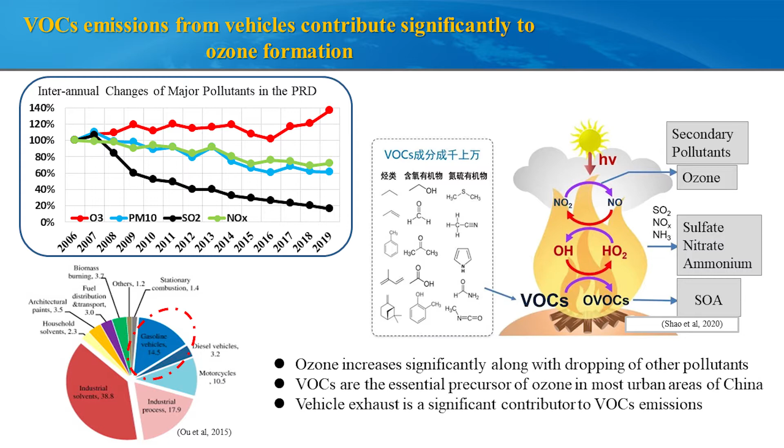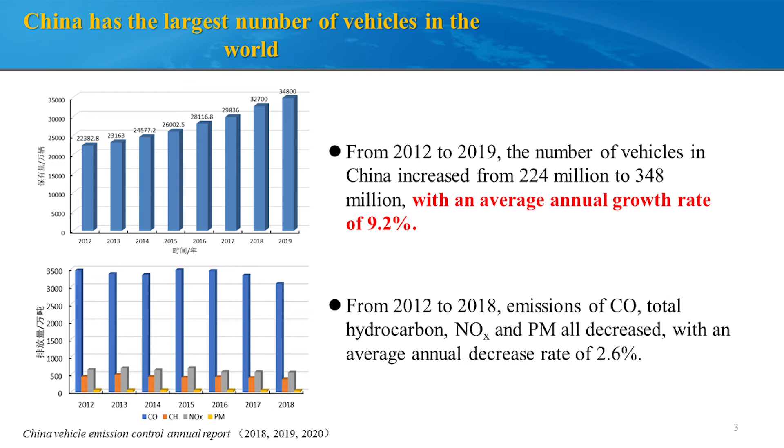In China, especially in urban areas, we know that vehicle exhaust, mobile emission, is a very significant contributor to the VOC emissions. From 2012 to 2019, the number of vehicles in China increased dramatically with an annual average growth rate of 9.2%. However, due to very stringent emission control measures, we see a continuously decreasing trend of pollutants, including CO, total hydrocarbon, NOx, and PM. Annual average decrease rate is about 2.6%. Overall, China has the largest number of vehicles in the world, so we expect China will contribute significantly to the VOC emissions.

Currently, investigation on VOC emissions from vehicles is a research frontier. There are measurement methods to study VOC emissions, for example, the tunnel study or the smog chamber measurement, chassis dynamometer measurement, and also the actual on-road condition measurement. All these kinds of measurements have been widely used to study vehicle emissions. However, a very important limitation is that previous studies mainly focused on non-methane hydrocarbons, while they largely neglected oxygenated VOC and intermediate VOC. So they cannot give a full picture of the VOC emissions from vehicles.

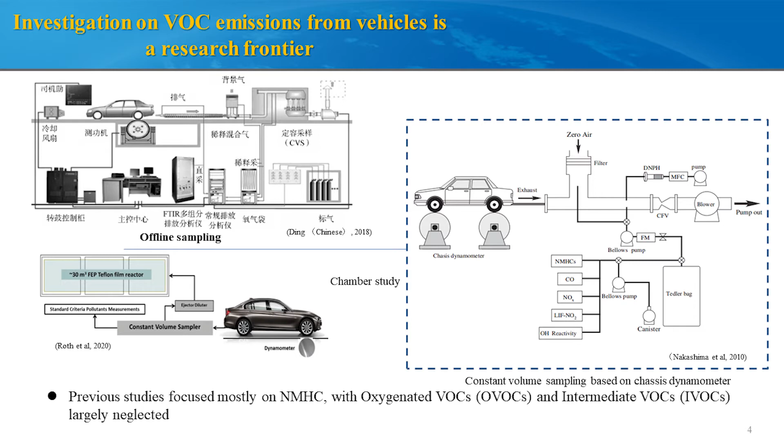So what are IVOCs? IVOCs are compounds with effective saturation concentration of 10^3 to 10^6 micrograms per cubic meter, with their volatilities lower than those of VOCs. So they correspond to alkanes with carbon number of around 12 to 22. If you increase the carbon number further, you will go to semi-volatile organic compounds. And then if the carbon number is larger than 34, it will go totally into the particle phase.

Previous study has also demonstrated that IVOCs were responsible for about 50% of SOA formation from gasoline vehicles and more than 95% from diesel vehicles. These figures are from a study in California. That is because IVOC emission studies are very limited worldwide. Most of the studies were concentrated only in the US or in China.

Characterization of IVOC emissions is quite challenging. There are two main challenges. One is for sampling, because IVOCs from vehicle exhaust are mostly emitted in gas phase. However, they have a very high temperature, more than 100 degrees, so we cannot measure it directly. We have to measure at the normal temperature, but they will go through gas-particle partitioning at normal temperature. So we have to conduct simultaneous sampling in both gas and particle phases for a comprehensive picture of IVOC emissions.

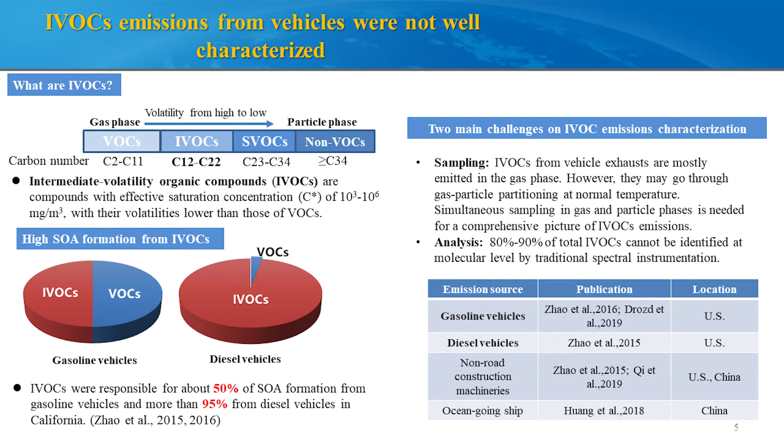The other challenge is for analysis, because over 80% of the total IVOC cannot be identified at a molecular level by traditional mass spectrum instrumentation. We have to find ways to quantify the total IVOC contribution. So the current status is that the formation processes of IVOC from vehicle exhaust are not quite clear. Impact of tightening emission standards on IVOC is not characterized; in the past decades, China has tightened its emission standards multiple times, but their impact on IVOC is not well studied. And lastly, formation potential of SOA from IVOCs is not accurately quantified.

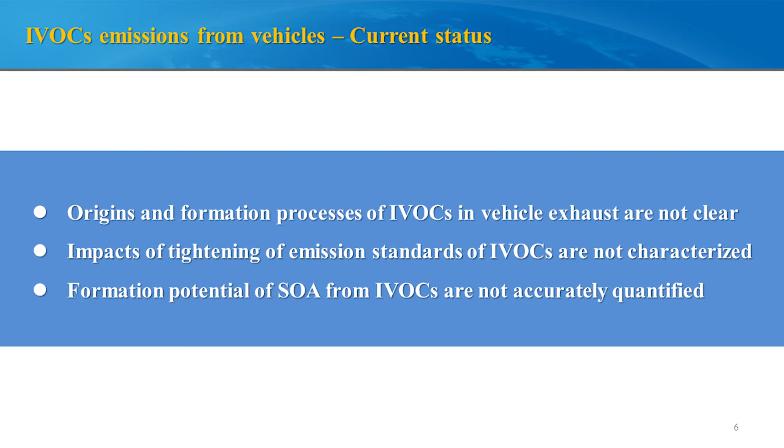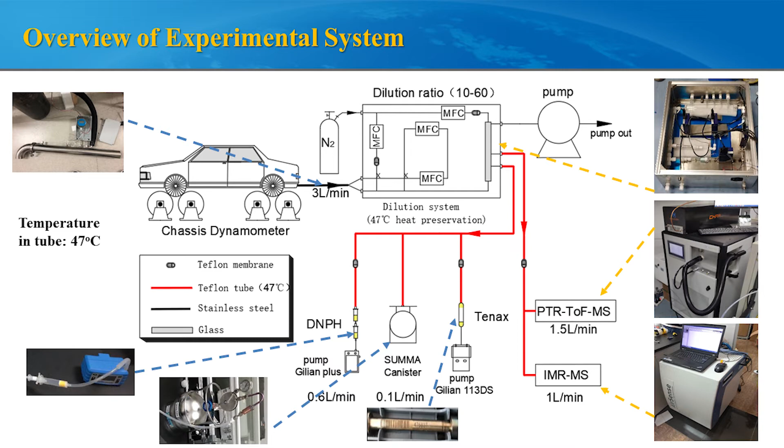In order to study these three important questions, we set up a very comprehensive experimental system, including a series of online and offline measurements. For the IVOC measurement, we have a Tenax tube behind a quartz fiber filter. To measure emission sources, especially combustion sources like vehicle exhaust, which has very high temperature, high humidity, and high concentration, we have to build a very smart dilution system. This dilution system has to be dynamic and adjustable because different kinds of vehicles may emit a vast range of concentrations.

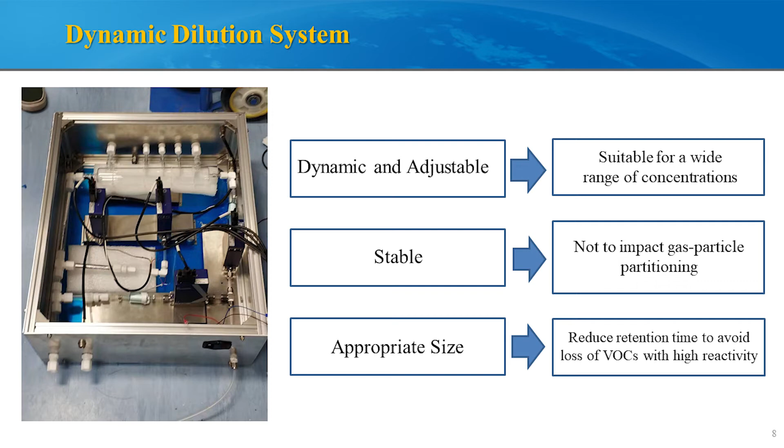It also has to be stable, because we try to avoid the impact of gas-particle partitioning, since the dilution ratio can impact the gas-particle partitioning directly. And lastly, it has to have an appropriate size, not too large. This is to reduce the retention time in our system to avoid VOC loss, especially for those VOCs with high reactivity.

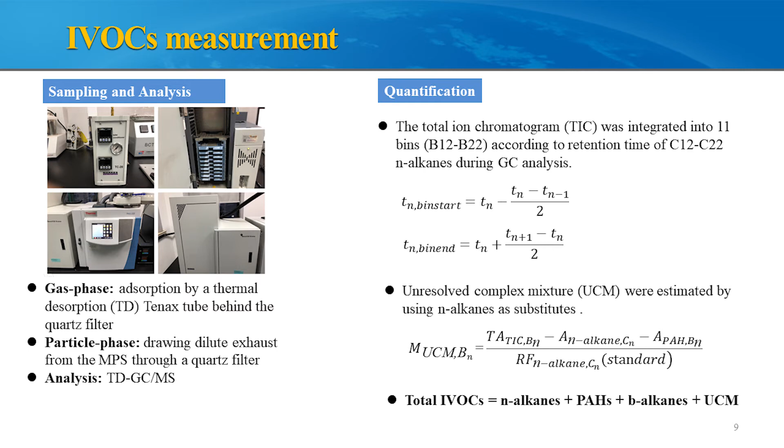For the IVOC measurement, we measure gas and particle phase simultaneously. For the gas phase, we measure by a thermal desorption Tenax tube behind the quartz filter. So we collect the particle phase on the filter first, and then we collect the gas phase by the Tenax tube after the filter. We analyze the sample by TD-GC-MS. We use this well-established method to quantify the IVOC mass and different compositions of IVOCs: n-alkanes, PAH, branched alkanes, and UCM, unresolved complex mixture. We cannot identify the specific species in UCM, so we use this empirical formula to calculate the total mass of UCM.

In this study, we tested 16 vehicles in total, including both gasoline and diesel vehicles, ranging from China 1, the oldest emission standard, to China 6, the newest emission standard. For diesel vehicles, we only covered China 3 to China 5. We used the VMAS simple transient condition cycle to conduct our sampling analysis.

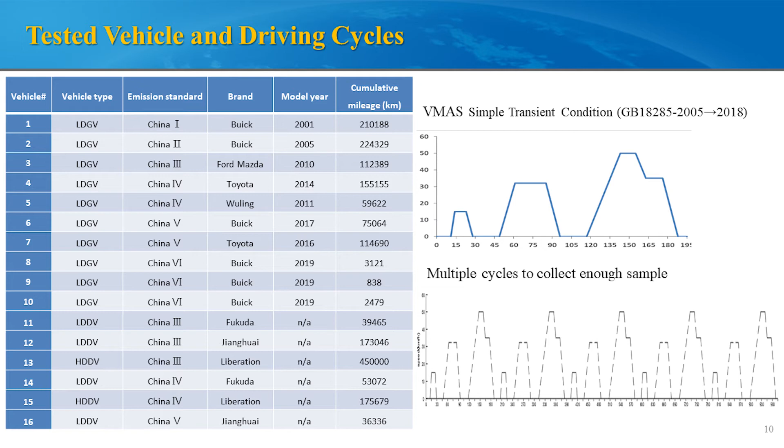This is the most prevalent method that can simulate the urban driving condition in China. And because IVOC emission is relatively little, we conduct multiple cycles to ensure that we can collect enough sample for analysis. Okay, let's look at some of our findings.

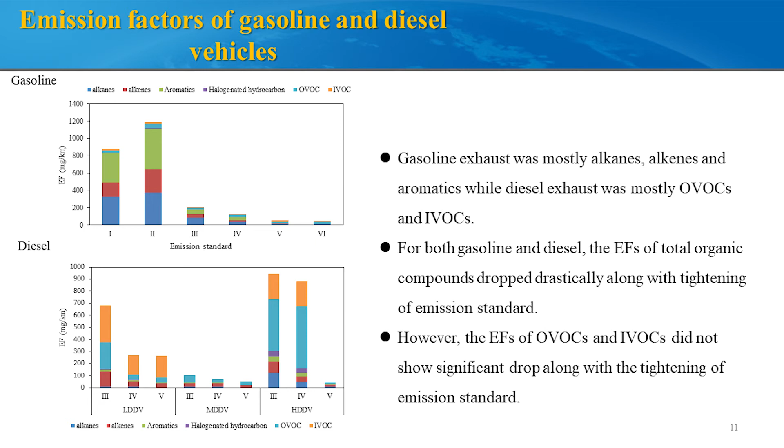However, the emission factor of OVOCs and IVOCs did not show significant drop along with the tightening of emission standard. They are almost at the same level in different emission standards. Well, percentage-wise, we can actually see IVOC and OVOC show a significant growth along with the tightening of emission standard. For example, for gasoline, from China 1 to China 6, their fraction increased from several percent to 23 and around half of the total organic emission.

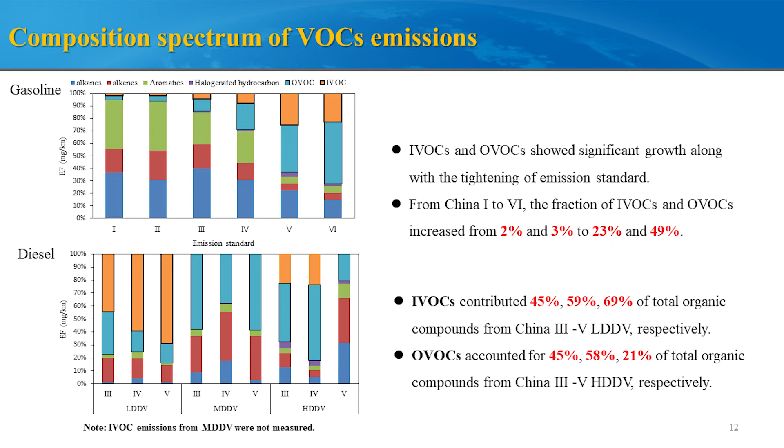For diesel, it's again the same. IVOC contributed more than half from different emission standards, while OVOC are more important for heavy diesel vehicles. IVOCs are more important for light-duty diesel vehicles. If we compare our finding with previous study in other parts of the world, we can see that the emission fraction of gasoline and diesel exhaust were comparable to their counterpart in the US.

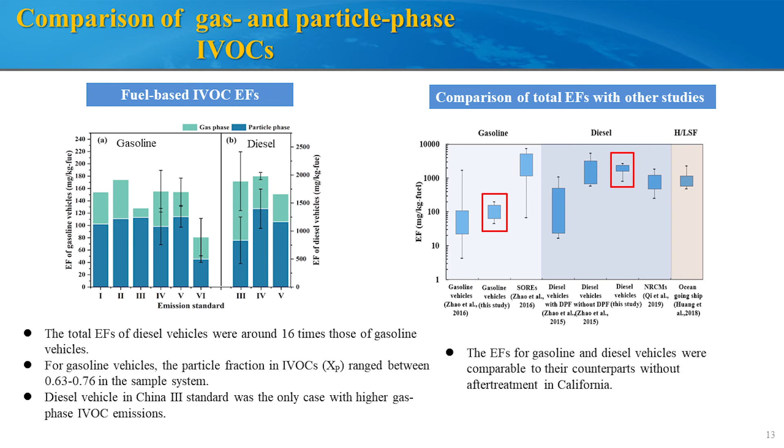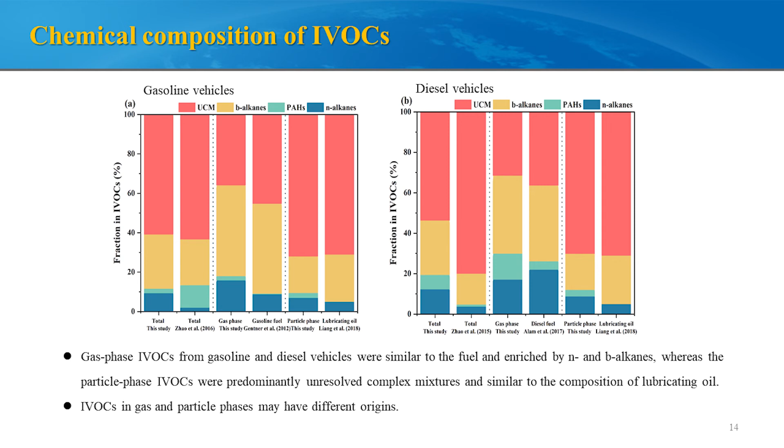However, particle phase has a different picture. This is the particle phase in our study. You can see that for gasoline vehicles, particle phase, they are quite different from fuel. However, they are similar to the composition of lubricating oil. Similarly for diesel particles, this is for particle phase composition. They are different from the diesel fuel, but they are similar to lubricating oil. So this let us think that gas phase IVOC and particle phase IVOC could be from different origins because their chemical compositions are largely different. Gas phase IVOC are mainly from fuel, while particle phase IVOC are mainly from lubricating oil.

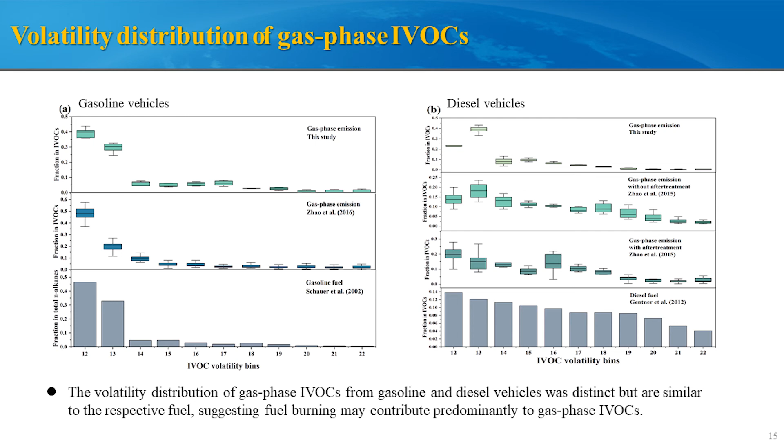So let's look at the volatility distribution of IVOC. Let's look at the gas phase first. For the gasoline vehicles, they are mainly concentrated in bin 12 and bin 13. The gas phase emissions are very similar to the composition of gasoline fuel. For diesel vehicle emission, they are different from gasoline, but they are also quite similar to the composition in the diesel fuel. So the volatility distribution of gas phase IVOC from gasoline and diesel were distinct, but are very similar to their respective fuel. This suggests that fuel burning may contribute predominantly to gas phase IVOC.

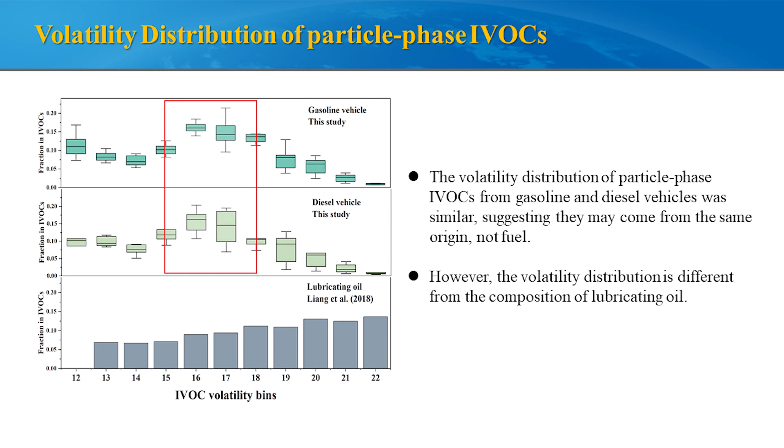And then let's look at the particle phase IVOC. In the particle phase, we see a very obvious peak around bin 16 to bin 18. There's a peak for both gasoline and diesel vehicles. Our previous hypothesis is that particle phase IVOC originated from lubricating oil. Let's look at the lubricating oil composition. They are different. There's a consistent increase along with the carbon number. So this shows that lubricating oil alone does not explain the volatility of particle phase IVOC for both gasoline and diesel.

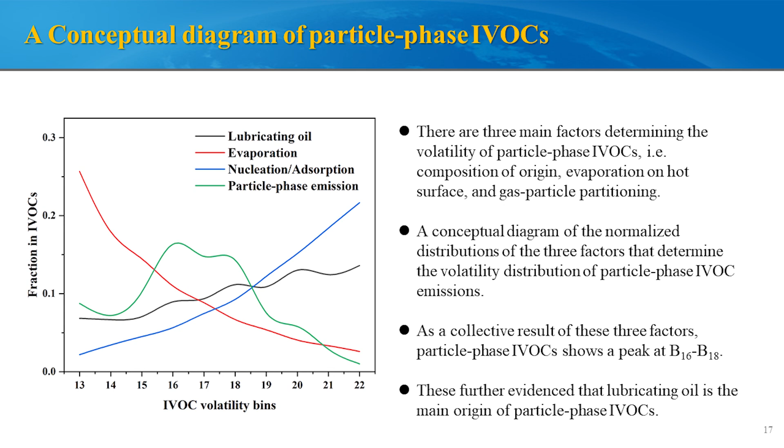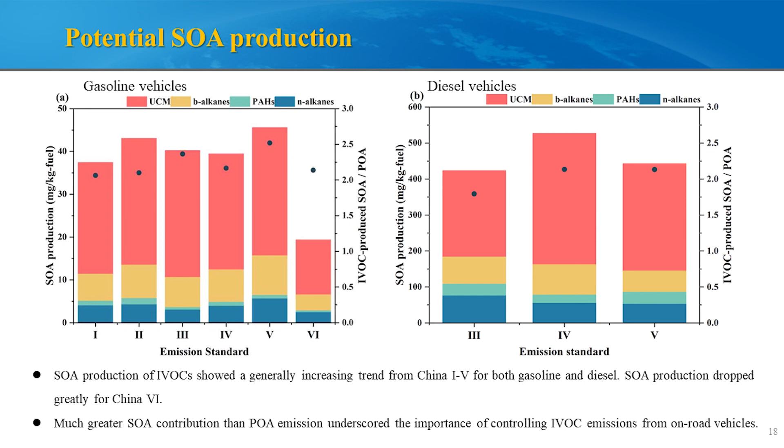So another very important piece of information is that when we look at the ratio between IVOC-produced SOA and POA, we can see that this ratio is above 2. That shows that the IVOC-produced SOA almost doubled that emitted directly from the vehicles. So the much greater SOA contribution underscores the importance of controlling IVOCs from on-road vehicles because they will generate much more particles. These are the key messages of my talk.